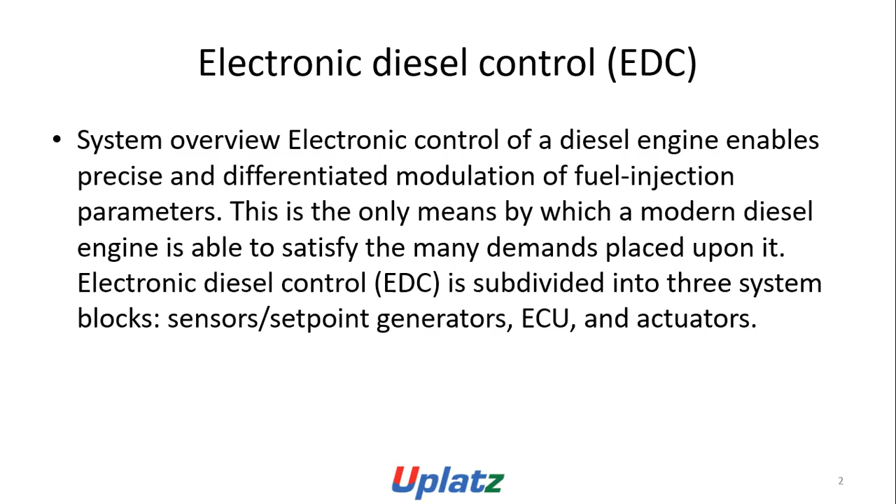Requirements: lowering fuel consumption and exhaust emissions (NOx, CO, particulates) combined with simultaneous improvement of engine power, output, and torque are the guiding principles of current diesel engine development. Conventional indirect injection engines (IDI) were no longer able to satisfy these requirements. State-of-the-art technology is represented today by direct injection diesel engines (DI) with high injection pressures for efficient mixture formation.

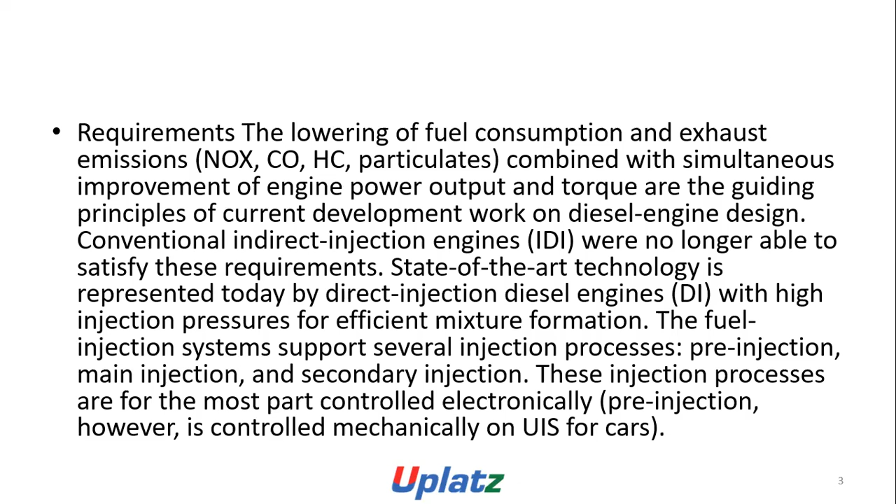The fuel injection system supports several injection processes: pre-injection, main injection, and secondary injection. These processes are for the most part controlled electronically. Pre-injection, however, is controlled mechanically on UIS for cars.

In addition, diesel engine development has been influenced by the high level of driving comfort and convenience demanded in modern cars. Exhaust and noise emissions are also subject to ever more stringent demands.

As a result, the performance demands of the fuel injection and management system have also increased, specifically with regard to high injection pressures, rate shaping, pre-injection and post-injection, adaptation of injected fuel quantity, boost pressure, and start of injection at the respective operating status.

Also required: temperature dependent excess fuel quantity, load-independent idle speed control, and controlled exhaust gas recirculation.

Other requirements include cruise control, tight tolerance for start of injection and injected fuel quantity, maintenance of high precision over the service life of the system, long-term performance, and support of exhaust gas treatment systems.

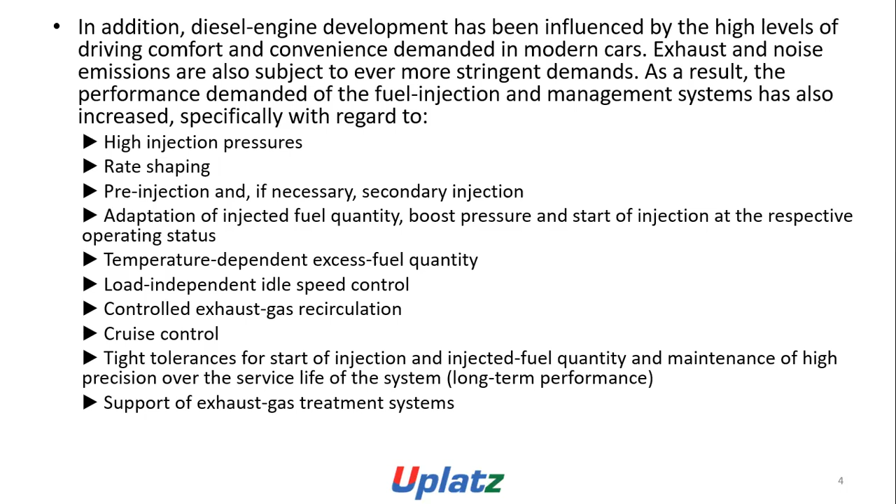EDC system blocks: sensors and setpoint generators include the accelerator pedal sensor, air mass sensor, rail pressure sensor, boost pressure sensor, temperature sensors for air and coolant, lambda oxygen sensor, wheel speed sensors, crankshaft and camshaft sensors, brake switch, clutch switch, and ignition switch.

These feed into loop control, CAN, and fault diagnosis. The ECU function is built from the processor, RAM, flash, EEPROM, a monitoring module, and other switching circuits.

Actuators include injectors, intake shut-off, boost pressure actuator, exhaust gas recirculation actuator, throttle actuator, AC compressor, auxiliary heating, radiator fan, rail pressure control valve, electronic shut-off valve, and diagnostic lamp.

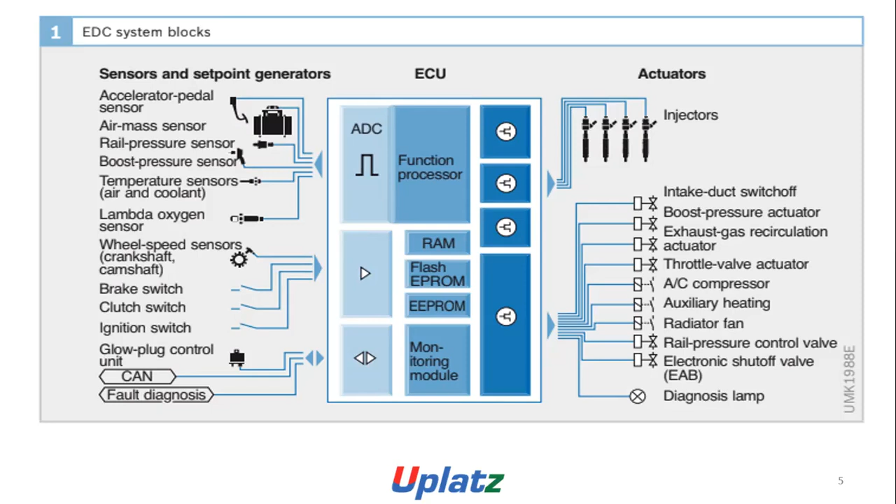Conventional mechanical RPM control uses a number of adjusting mechanisms to adapt to different engine operating statuses and ensure high quality mixture formation. Nevertheless, it is restricted to a simple engine-based control loop.

There are a number of important influencing variables that conventional control cannot take account of or cannot respond to quickly enough. As demands have increased, EDC has developed into a complex electronic engine management system capable of processing a large amount of data in real time.

In addition to its pure engine management function, EDC supports a series of comfort and convenience functions, for example cruise control. It can form part of an overall electronic speed control system, drive-by-wire.

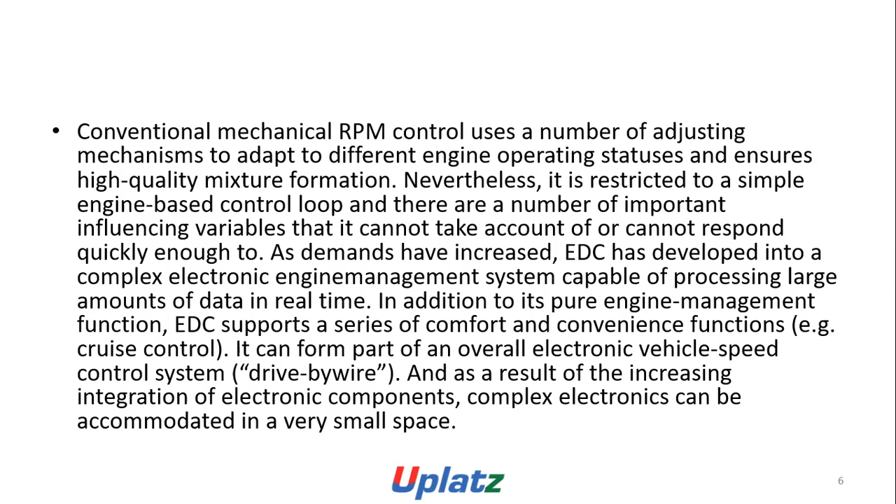This is a result of the increasing integration of electronic components. Complex electronics can be accommodated in a very small space.

Operating principles: electronic diesel control is capable of meeting the requirements listed above as a result of microcontroller performance that has improved considerably in the last few years.

In contrast to diesel engine vehicles with conventional inline or distributor injection pumps, the driver of an EDC controlled vehicle has no direct influence, for instance through the accelerator pedal and bowden cable, upon the injected fuel quantity.

Instead, the injected fuel quantity is determined by a number of influencing variables. These include driver command, accelerator pedal position, and operating status.

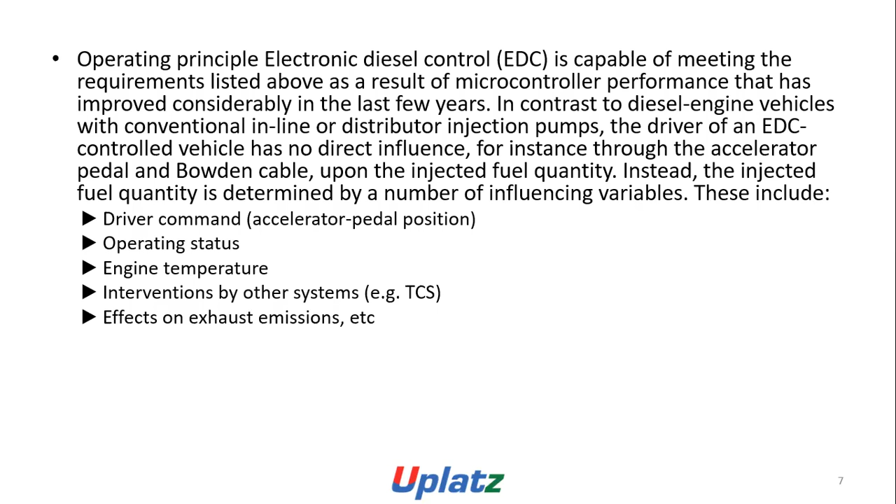Other variables include engine temperature, and intervention by other systems, for example TCS, which affects exhaust emissions. The ECU calculates the injected fuel quantity on the basis of all these influencing variables.

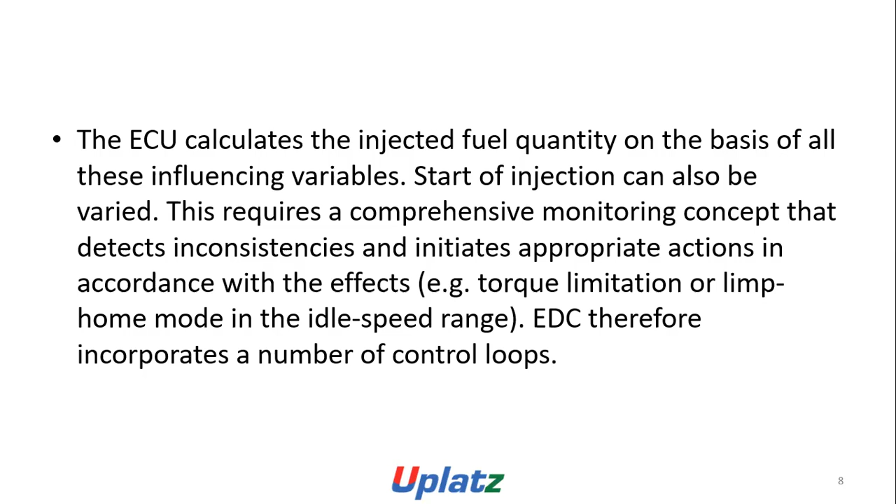Start of injection can also be varied. This requires a comprehensive monitoring concept that detects inconsistencies and initiates appropriate actions in accordance with the effects, for example torque limitation or limp mode in the idle speed range. EDC therefore incorporates a number of control loops.

Electronic diesel control allows data communication with other electronic systems such as the traction control system, electronic transmission control (ETC), or electronic stability program (ESP). As a result, the engine management system can be integrated in the vehicle's overall control system.

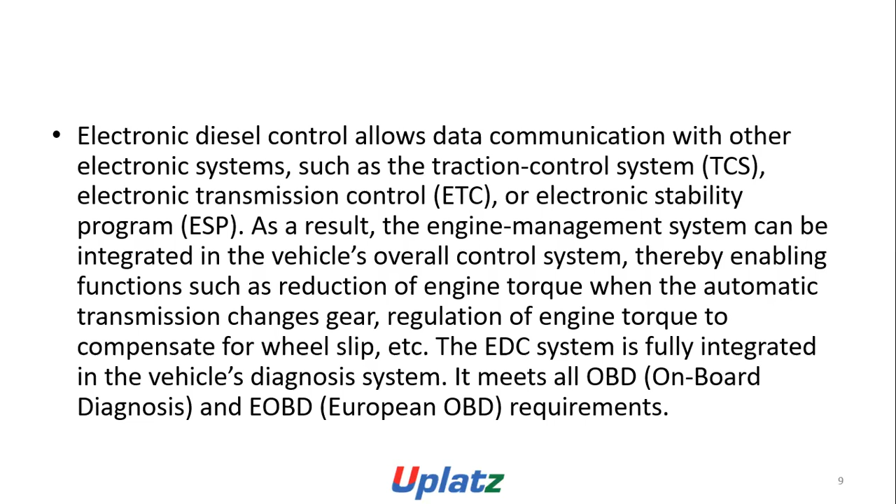This enables functions such as reduction of engine torque when the automatic transmission changes gear, and regulation of engine torque to compensate for wheel slip. The EDC system is fully integrated in the vehicle's diagnosis system and meets all onboard diagnosis and European onboard diagnosis requirements.

System blocks: electronic diesel control is divided into three system blocks. Sensors and setpoint generators detect operating conditions, for example engine speed, and setpoint values, for example switch position. They convert physical variables into electrical signals.

The ECU processes the information from the sensors and setpoint generators through mathematical computing processes using open and closed loop control algorithms. It controls the actuators by means of electrical output signals.

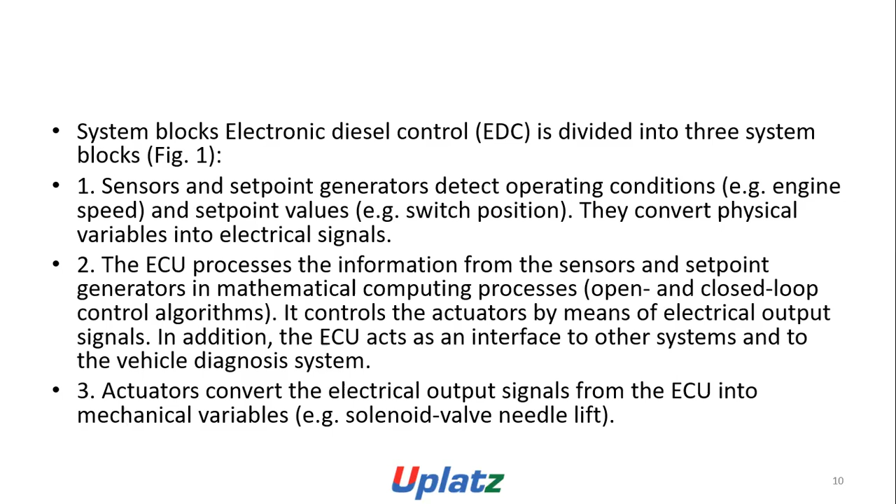In addition, the ECU acts as an interface to other systems and to the vehicle diagnosis system. Actuators convert the electrical output signals from the ECU into mechanical variables, for example solenoid-valve needle lift.

Data processing: the main function of the electronic diesel control is to control injected fuel quantity and the injection timing. The common rail accumulator injection system also controls injection pressure. Furthermore, on all systems, the engine ECU controls a number of actuators.

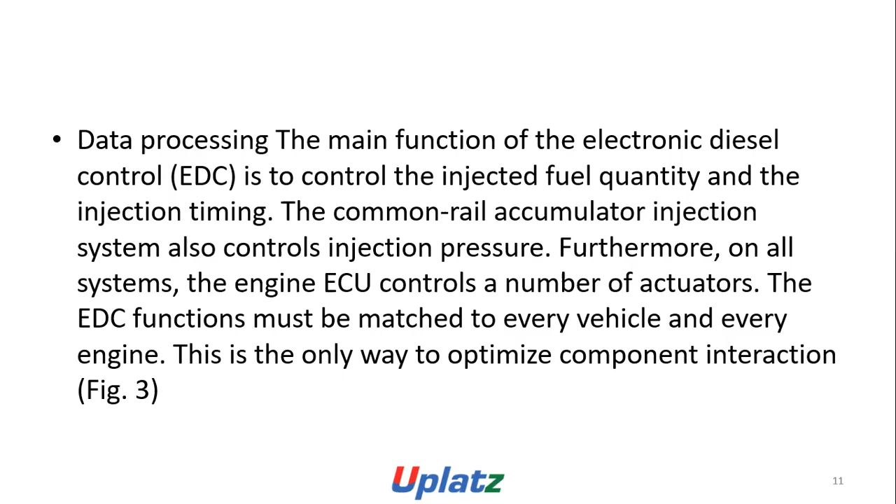The EDC function must be matched to every vehicle and every engine. This is the only way to optimize component interaction.

Schematic: you see the example of a current regulator. I actual, I set point is set, and it goes through a series of control actions and comes to the PWM set point.

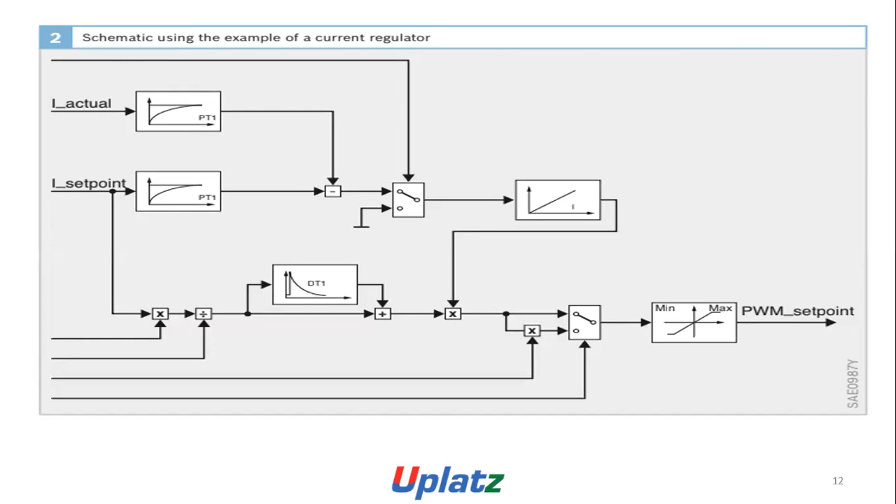Basic sequence of electronic diesel control: fuel control circuit 1, fuel injection component, fuel control circuit 2, engine, diversion via driver, triggered fuel injection control, triggering of the fuel injection components.

It consists of a CAN interface through which data exchange with other systems happens: transmission control system, AC control, etc.

The central one is the sensors and setpoint generators, actuators, sensors, speed sensors, and switches, to which driver commands come, such as driver cruise control and engine brakes. The output control and integration of the remaining actuators happens through the CAN interface.

Sensors get information from cylinder charges, control system, supercharging, exhaust gas recirculation, and the control actuates electropneumatic converter, continuous operation, brake system, fan and glow-time control.

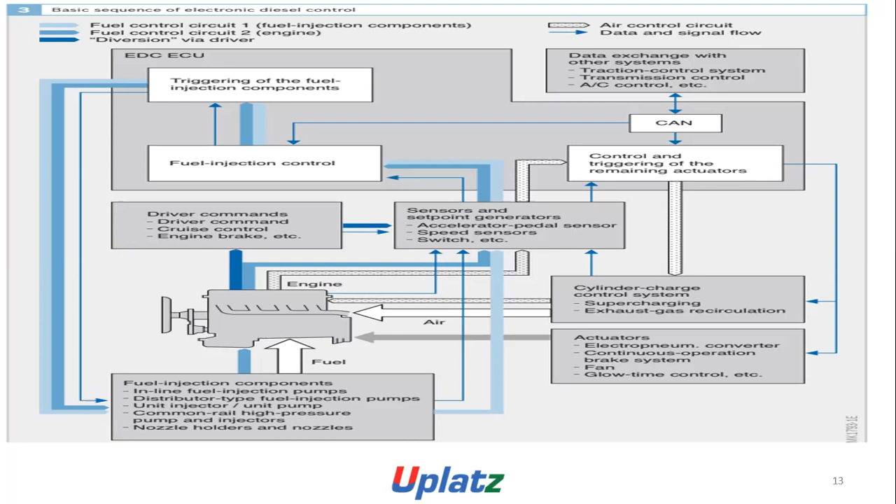The control unit evaluates signals sent by the sensors and limits them to the permitted voltage level. Some input signals are also checked for plausibility.

Using this input data together with stored program maps, the microprocessor calculates the position and duration for injection timing. This information is then converted into a signal characteristic which is aligned to the engine's piston strokes. This calculation program is termed the ECU software.

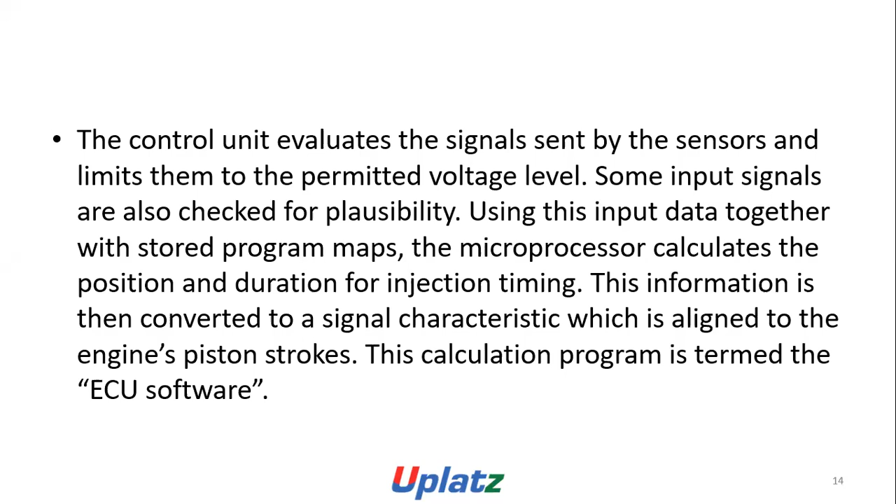The required degree of accuracy together with the diesel engine's outstanding dynamic response requires high computing power. The output signals are applied to the driver stages, which provide adequate power for actuators.

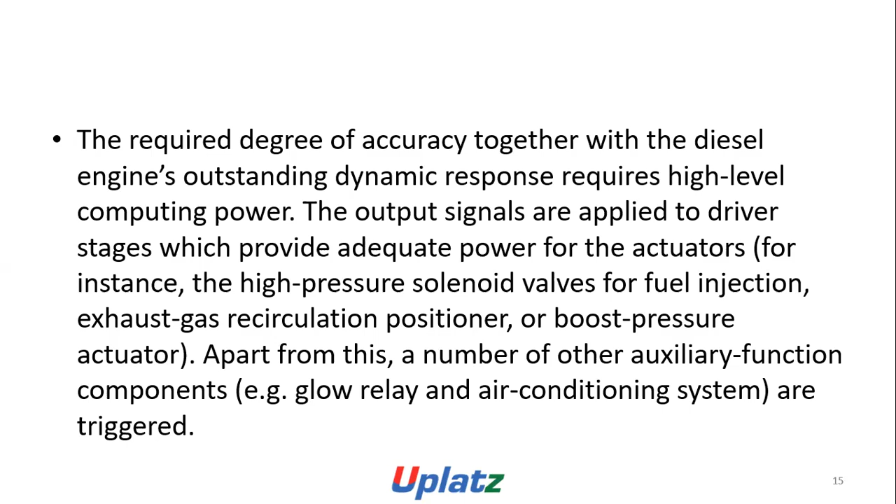For instance, the high pressure solenoid valves for fuel injection, exhaust gas recirculation positioner, or boost pressure actuator. Apart from this, a number of other auxiliary function components, for example, glow relay and air conditioning system, are triggered.

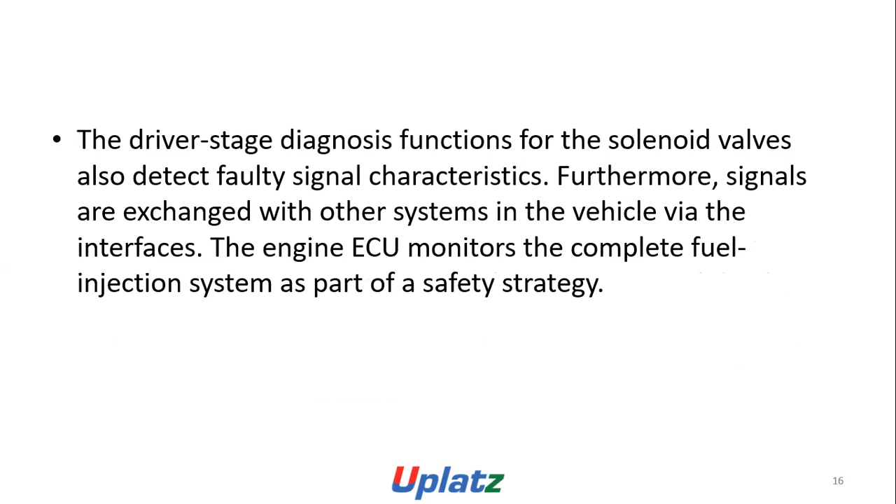The driver stage diagnosis functions for the solenoid valves also detect faulty signal characteristics. Furthermore, signals are exchanged with other systems in the vehicle via the interfaces. The engine ECU monitors the complete fuel injection system as part of a safety strategy.

Fuel injection control table 1 provides an overview of the EDC functions which are implemented in the various fuel injection systems. Figure 4 shows the sequence of fuel injection calculation with all functions, a number of which are optional extras. These can be activated in the ECU by the after-sales service when retrofit equipment is installed.

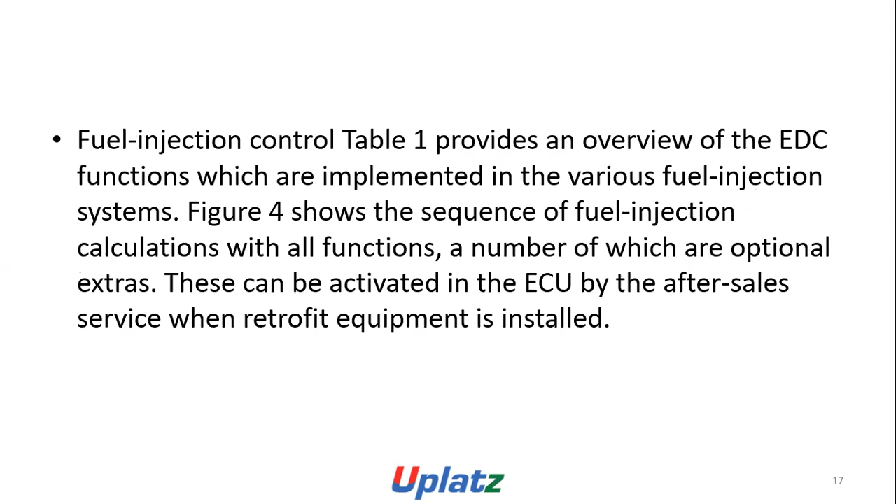In order that the engine can run with optimal combustion under all operating conditions, the ECU calculates exactly the right injected fuel quantity for all conditions.

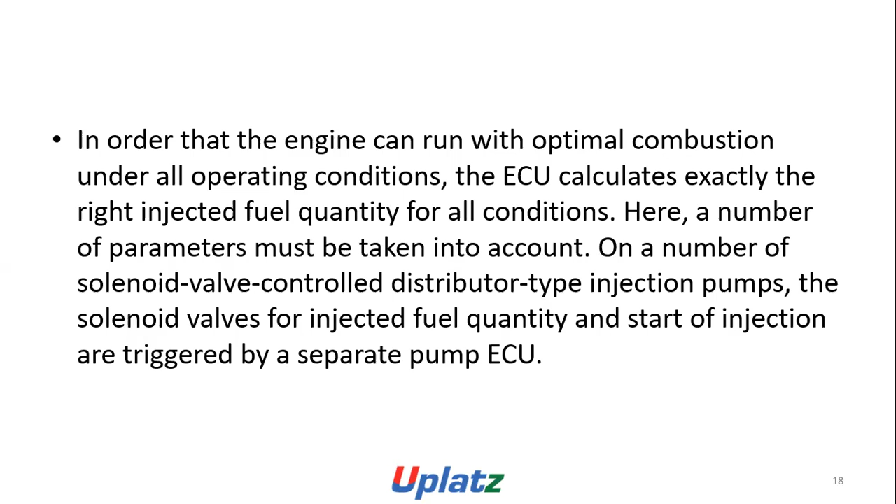Here, a number of parameters must be taken into account on solenoid valve control distributor type injection pumps. The solenoid valve for injected fuel quantity and start of injection are triggered by a separate pump ECU.

And the table shows the overall view of EDC variants for motor vehicle fuel injection systems: inline fuel injection pumps,

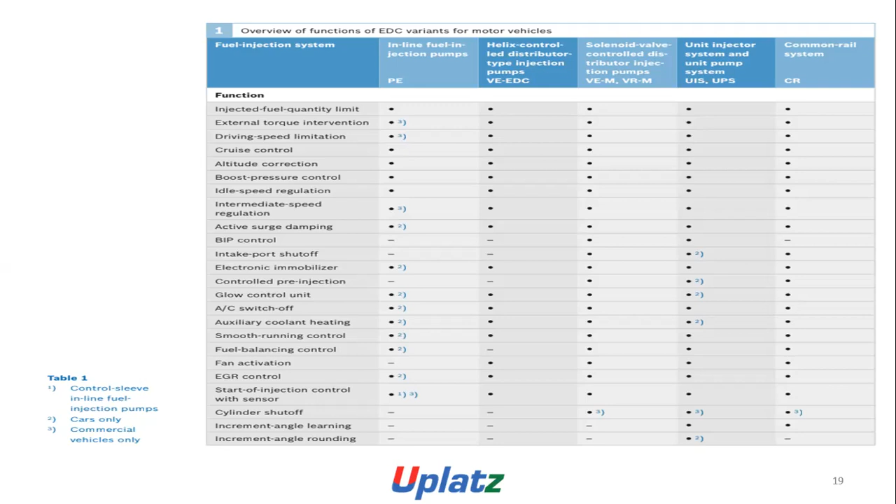The functions are: injected fuel quantity limit, external torque intervention, driving speed limitation, cruise control, altitude correction, boost pressure control, idle speed regulation, intermediate speed regulation, active surge damping, BIP control, intake port shutoff, electronic immobilizer, controlled pre-injection, glow control unit, AC switch off, auxiliary coolant heating, smooth running control, fuel balancing control, fan activation, EGR control, start-of-injection control with sensor, cylinder shut off, increment angle learning, and increment angle rounding.

Calculation of fuel injection process in ECU: requests the calculations: accelerator sensor input by the driver, and input from other systems—ABS, ESP—via CAN.

It goes to the external torque intervention, and cruise control, driving speed limiter is another input, and speed selection of desired injection fuel quantity. Injected fuel quantity limit is checked,

and idle speed control and fuel balancing control is affected. Then start switch and vehicle operation happens.

Smooth running regulator is one of the inputs for that. Then start quantity is another input. Then quantity metering pump map and control for start of the injection and start of the delivery.

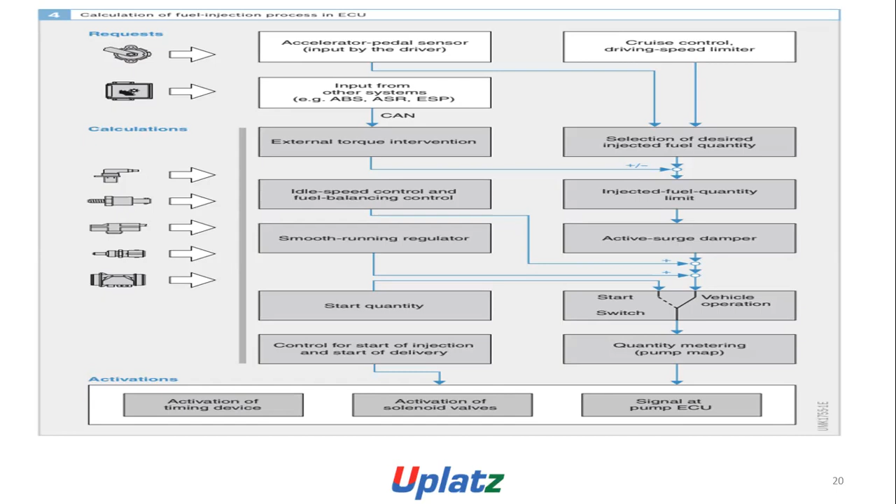All this comes to the activations: activation of timing devices, activation of solenoid valve, and signal pump ECU are affected. Torque control.

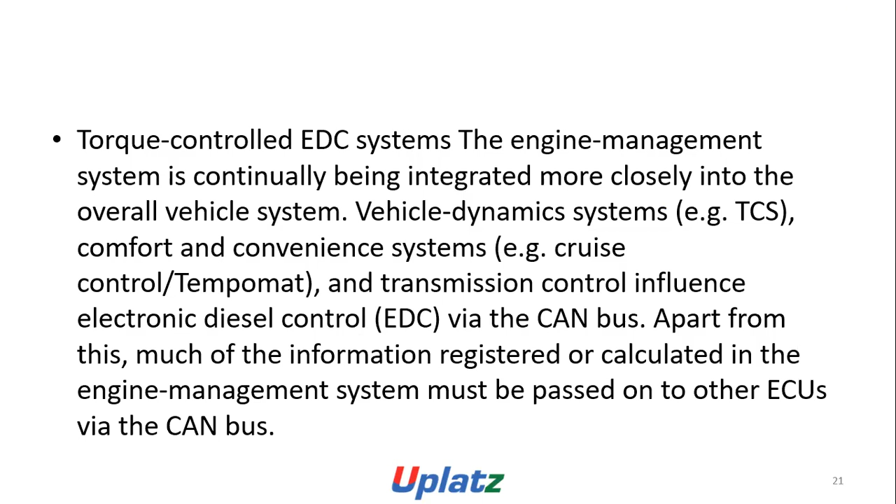Torque control EDC system: the engine management system is continually being integrated more closely into the overall vehicle system, vehicle dynamic systems, comfort and convenience systems, cruise control and tempomat, and transmission control, electronic diesel control, via the CAN bus. Apart from this, much of the information registered or calculated in the engine management system must be passed on to the other units via the CAN bus.

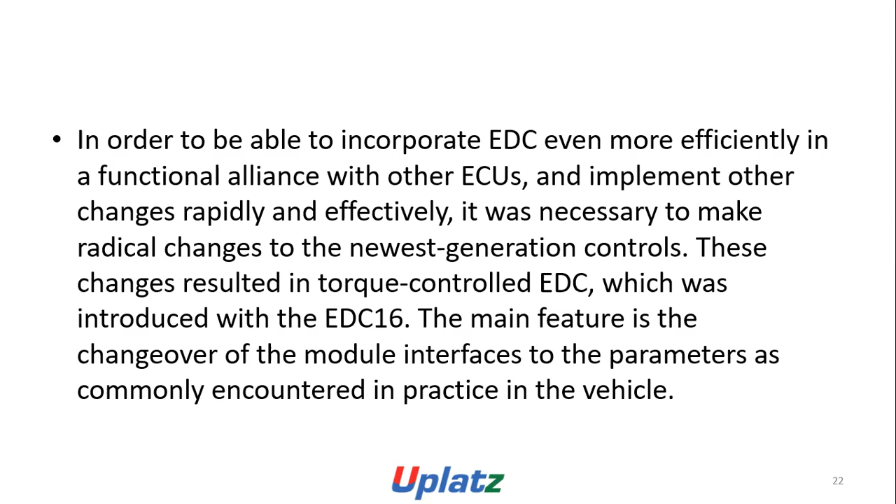In order to incorporate EDC more efficiently in a functional alliance with other ECUs and implement other changes rapidly and effectively, it was necessary to make radical changes to the newest generation control. These changes resulted in torque control EDC, which was introduced with the EDC 16. The main feature is the changeover of the module interfaces to the parameters as commonly encountered in practice in the vehicle.

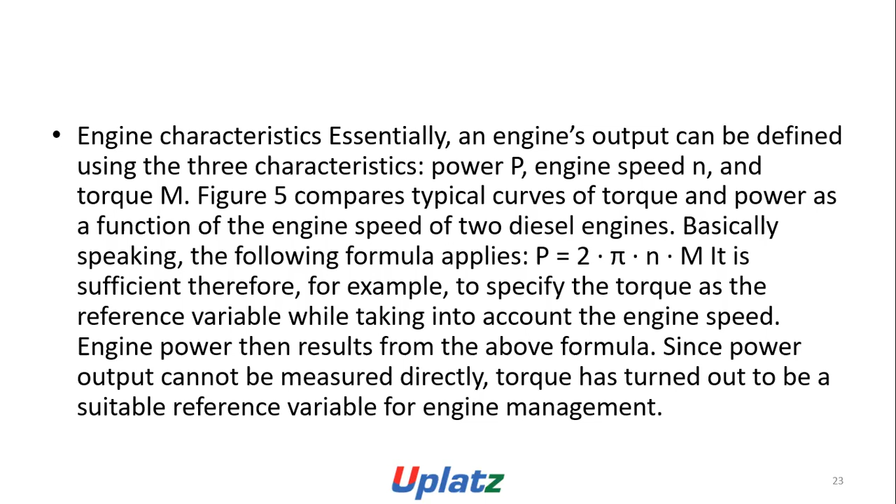Since power output cannot be measured directly, torque has turned out to be a suitable reference variable for engine management. When accelerating, the driver uses the accelerator pedal sensor to directly demand a given torque from the engine. Independently of the driver's requirement, other external vehicle systems submit torque demands via the interfaces resulting from the power requirements of the particular component, for example the air conditioning system or the alternator. Using this torque requirement input, the engine management system calculates the output engine torque to be generated and controls fuel injection and air system actuators accordingly.

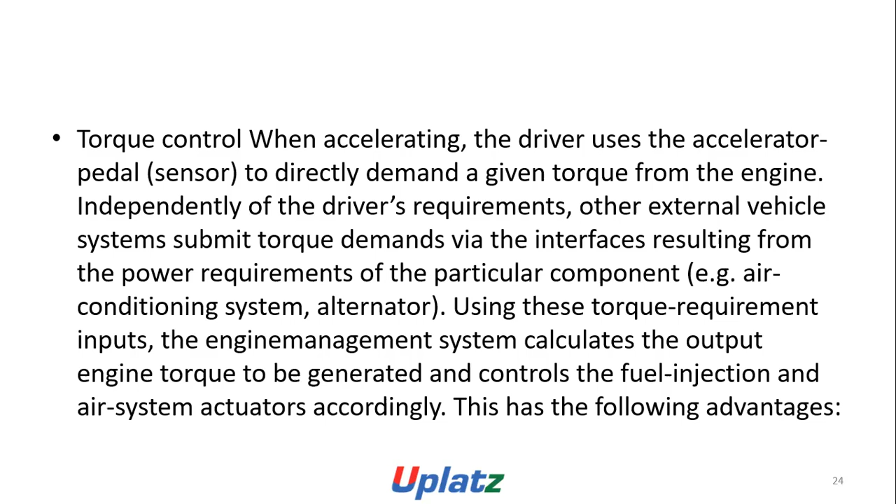This has the following advantages: no system has direct influence on the engine management boost pressure or fuel injection quantity. The engine management can thus also take into account other higher-level optimization criteria for external requirements, such as exhaust gas emission and fuel consumption, and control the engine in the best way possible. Many of the functions which do not directly concern the engine management system can be designed to function identically for diesel and gasoline engines. Expansions to the system can be implemented quickly.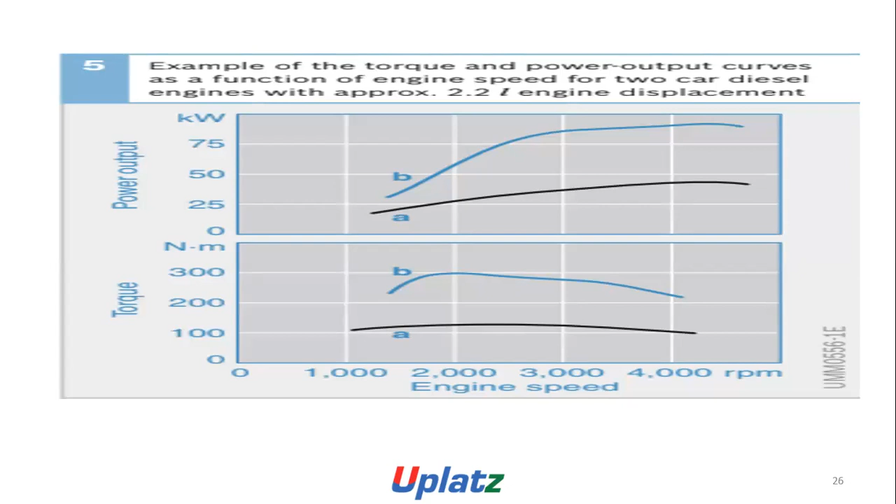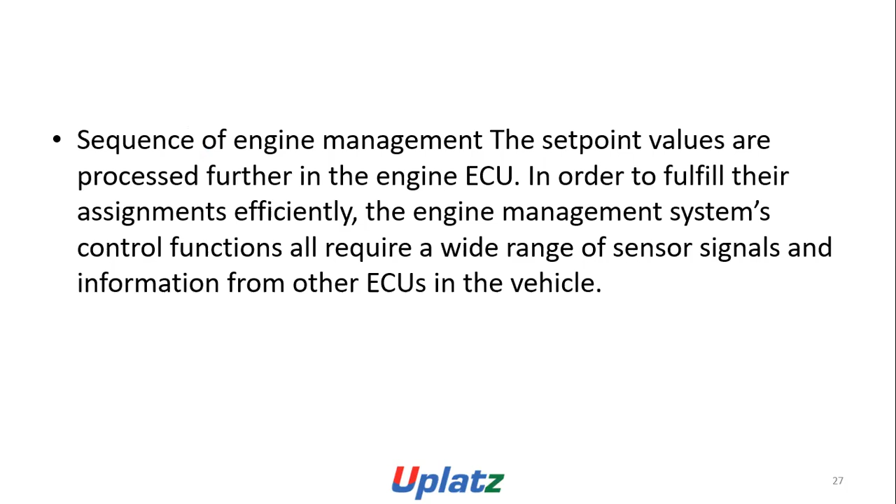Sequence of engine management: the setpoint values are processed further in the engine ECU in order to fulfill other assignments efficiently. The engine management system's control functions also require a range of sensor signals and information from other ECUs in the vehicle. Propulsion torque: the driver's input, that is the signal from the accelerator sensor, is interpreted by the engine management system as the request for propulsion torque. The inputs from the cruise control and the vehicle speed limiter are processed in exactly the same manner.

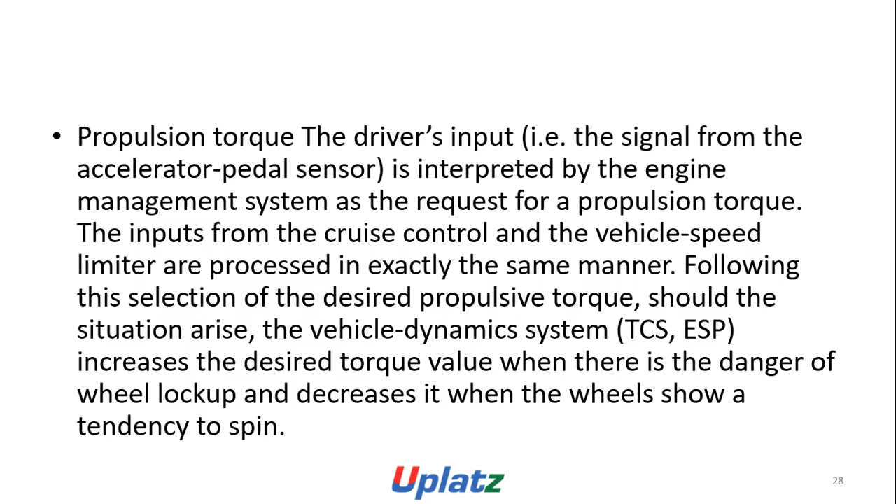Following this selection of desired propulsive torque, should the situation arise, the vehicle dynamic system, TCS/ESP, increases the desired torque value when there is a danger of wheel lockup and decreases it when the wheels show a tendency to spin. Further external torque demands, the drivetrain torque adaptation, must be taken into account. Drivetrain transmission ratio is defined for the most part by the ratio of a particular gear or by the torque converter efficiency in the case of automatic transmissions.

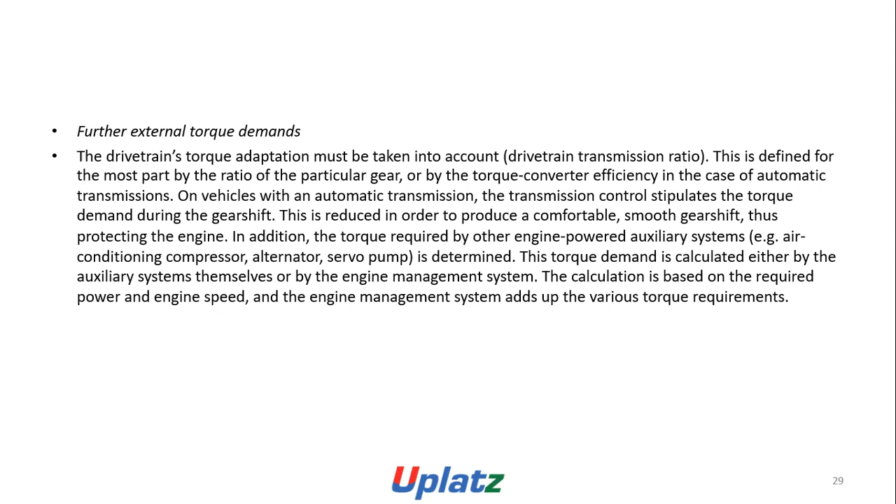On vehicles with automatic transmission, the transmission control stipulates the torque demand during the gear shift. This is reduced in order to produce a comfortable, smooth gear shift, thus protecting the engine. In addition, the torque required by other engine-powered auxiliary systems, for example the air conditioning compressor or a pump, is determined. This torque demand is calculated either by the auxiliary systems themselves or by the engine management system, based on the required power and engine speed, and the engine management system adds up the various torque requirements. Vehicle drivability remains unchanged, notwithstanding varying requirements from the auxiliary systems and changes in engine operating state.

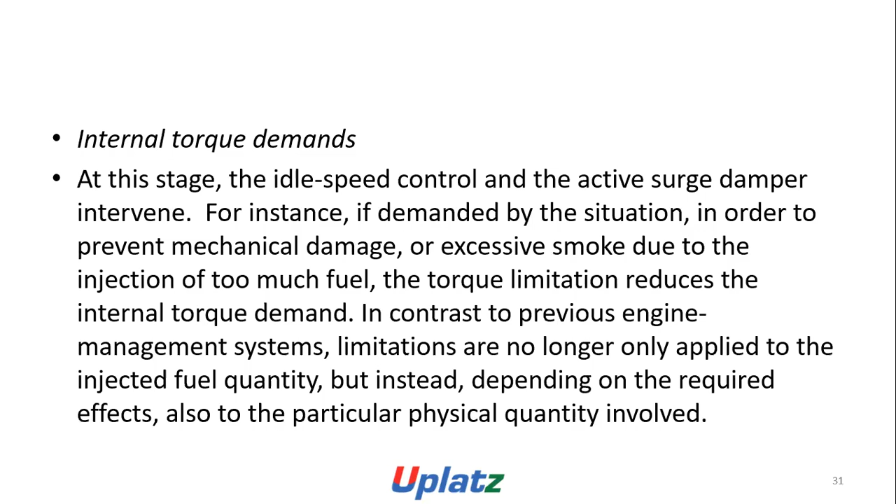Internal torque demands: at this stage, the idle speed control and the active surge damper intervene. For instance, if demanded by the situation, in order to prevent mechanical damage or excessive smoke due to injection of too much fuel, the torque limitation reduces the internal torque demand. In contrast to previous engine management systems, limitations are no longer only applied to the injected fuel quantity, but instead, depending on the requirement, also to the particular physical quantity involved. Engine losses are also taken into account.

Friction, drive for the high pressure pump: the torque represents the engine's measurable effect to the outside. However, the engine management system can only generate these effects in conjunction with the correct fuel injection, together with the correct injection point and the necessary marginal conditions as applied to the air system, for example boost pressure and exhaust gas recirculation. The required injected fuel quantity is determined using the current combustion efficiency. The calculated fuel quantity is limited by a protective function, for example protection against overheating, and if necessary can be varied by smooth running control.

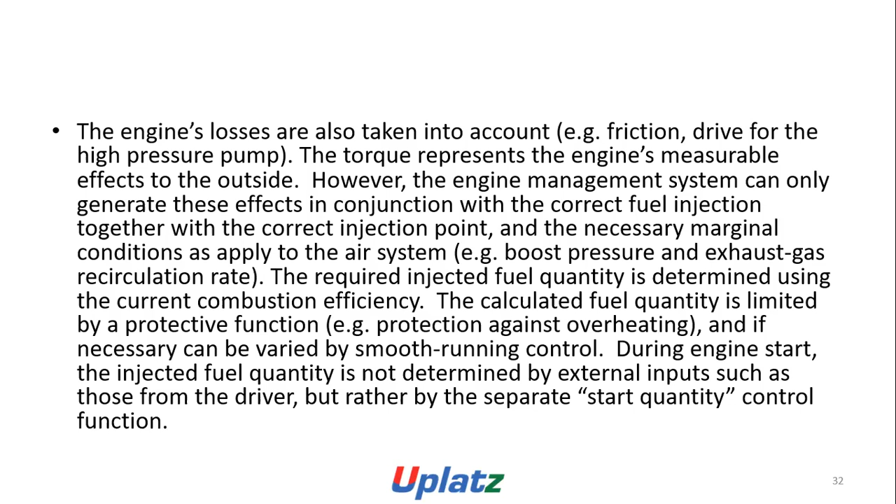When the engine starts, the injected fuel quantity is not determined by external inputs such as those from the driver, but rather by a separate start quantity control function. Actuator-wise, the resulting setpoint value for the injected fuel quantity is used to generate the triggering data for the injection pump and/or the fuel injector, and for defining the optimum operating point of the intake air system.